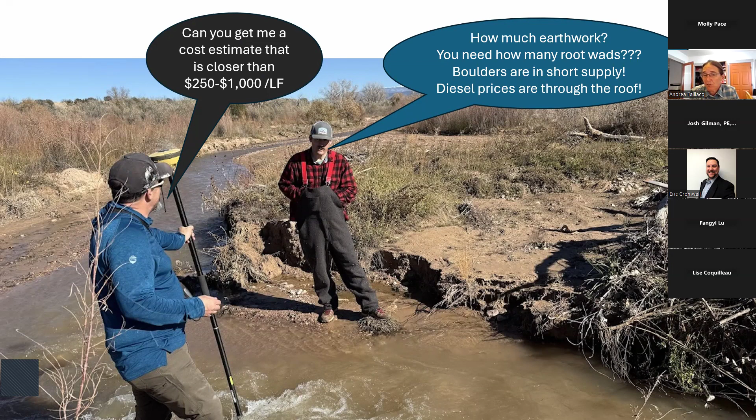And then we work with some other clients that will go back in time, and they of course Google a manual and come to the meetings and say, well, you have to do this. Never mind that you work in stream restoration every day or you have expertise in one area of this or another. You have to follow this manual, even though it may not be applicable because we've learned so much more over time. That's one of the places technology really brings us problems, in that it keeps older material in front of our stakeholders. It gives us a large mountain of information to try to overcome these assumptions.

Most of our projects start with a geomorphic reach survey. What we're going to try to figure out is what is the cause of the problem, ideally, because if it's not broke, we don't want to fix it. Your typical geomorphic assessment includes a couple cross sections, a longitudinal profile, maybe a bar sample, some active riffle pebble counts. Maybe you do a banks assessment, but it's pretty sparse data.

And this is where we really get into technology. So we have used drones. We own a LiDAR drone, and we are able to collect a lot of data really quickly by flying that drone. However, with lots of data comes lots of data processing. So a picture can save us 1,000 words, steps, or minutes, but it may also require additional time in the office. So we have to consider that when using technology.

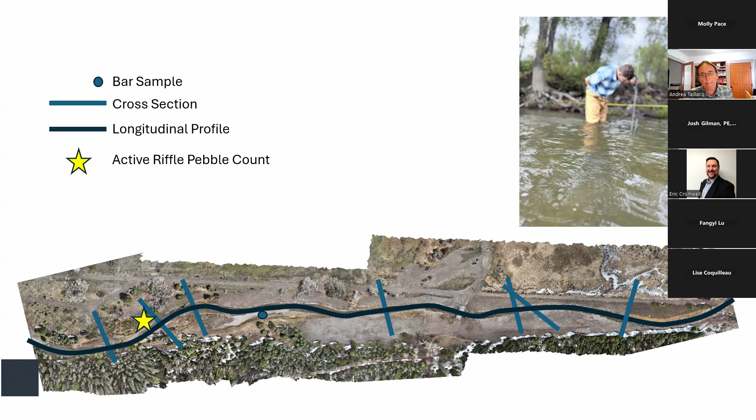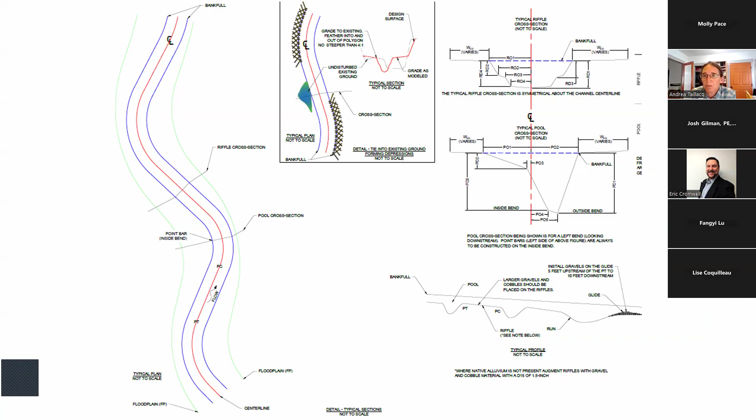Back in the 1990s, it was pretty typical to just use typicals, and you have small groups. They all have very similar backgrounds, so they can kick the dirt, have a conversation, and lo and behold, successfully implement a project. And there are many people that can do this.

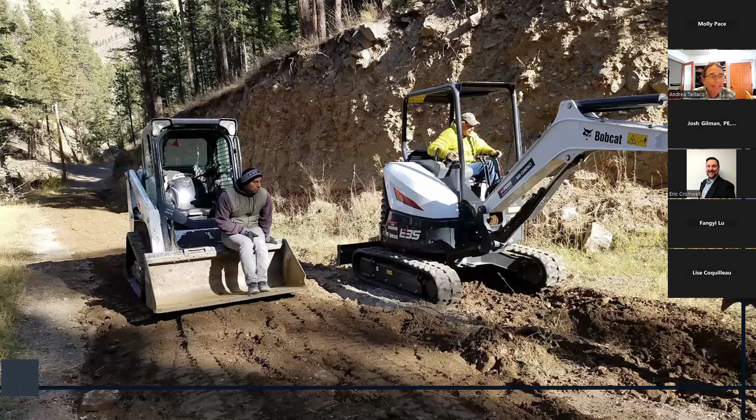As our projects have increased in complexity, we have transitioned to the breakline spreadsheet. There's various other proprietary applications that have been used to do stream grading, so we can do this in 3 dimensions. We have models, we can put that in HEC-RAS, and we can do all sorts of evaluations. I'm going to talk mostly towards Stream Tools and Corridors, and then do a little bit of preview for Stream Tools Flex, which I'm currently working on.

One of the challenges we took on with the COVID pandemic was taking this breakline spreadsheet, which David Beidelschbach, Mike Geenan, and others developed to do grading for channels that includes riffles and pools. I think it was in about 2019, we were helping David with some projects, and he had about 5 interns. One of the things we really noted was how much time the interns were spending trying to learn about managing text files to use a spreadsheet to bring it in and out of CAD. I was like, well, we could probably put this in CAD. And so that was where Stream Tools was born from, was figuring out how to put it into CAD.

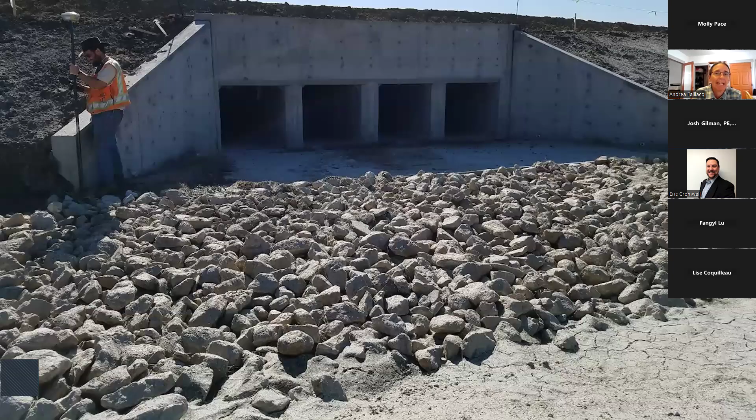As our groups become larger and more diverse, we're having more and more questions, and more and more complex projects with infrastructure, endangered species, material availability. So as our projects require tighter tie-ins and increased complexity, we need technology to be able to model these systems prior to mobilizing construction equipment.

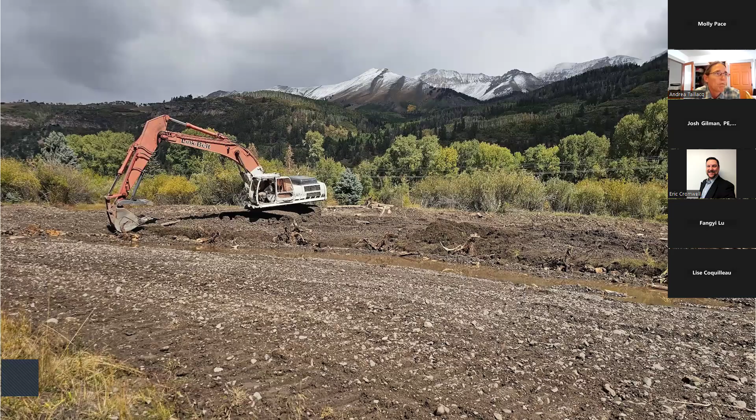And at this point, the technology exists that that excavator has a GPS unit mounted on it, and that bucket will stop at the grading limits.

Just because we can put something into a computer doesn't necessarily mean that it should start there. Often it helps to draw things out. We've got a whiteboard in the hallway, and we'll draw it out and think about what's going on, where our computer outputs are wrong. Where computers really come in is they're really good at doing repeatable tasks. So you do it once or twice, you figure out a process, and then you let the computer do the rest of it. And that's exactly what Stream Tools, Corridors, all of those tools do.

So I brought in this example project. This is the grading sheet from one of the projects we worked on. Some of the technology we routinely use includes RTK GPS. We did all the geomorphic survey. The existing ground was from LiDAR we collected. We often use 3DEP, but this particular site had a lot of earthwork moved, so 3DEP was no longer representative of conditions.

We evaluated flood risk with HEC-RAS 2D, planting zones, very detailed. It was constructed with GPS-enabled equipment, which wouldn't have been possible without this detailed site plan. All the channel grading was done with Stream Tools.

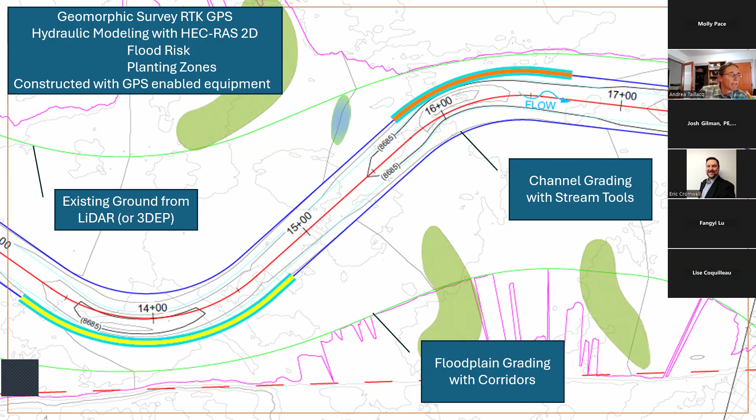So I think one of the takeaways was technology should allow us to do more analysis. It should allow us to paint clearer pictures for our stakeholders, evaluate alternatives, and really emphasize that it can save time and save money, but it doesn't always. Technology always requires synthesis, and one of the big things technology helps us do is generate quantities.

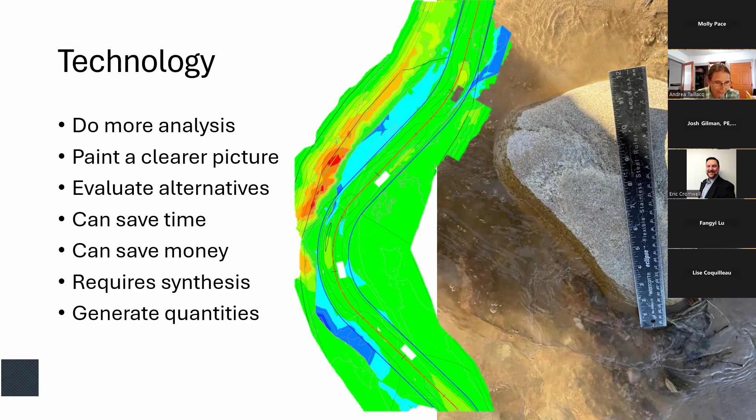If you draw your toe wood to scale, you can literally count the toe wood in the drawing to make sure you have enough. But that doesn't account for various sizes of trees, and it doesn't account for the human factor, which we always have to have in.

And so in many projects, you develop and spend all this time putting together plans, and then your contractor says, well, I know what it says, I'm not going to read the plans. And you get to the end of this and you're like, why do we have materials left over? And why does this not look like the plans?

So although you have detailed plans, it doesn't replace construction observation, and it doesn't replace time in the field. We often end up with stakeholders who think they understand what's going on, but it's really hard to get them out in the field. In which case, they tend to not have as much of a realistic vision.

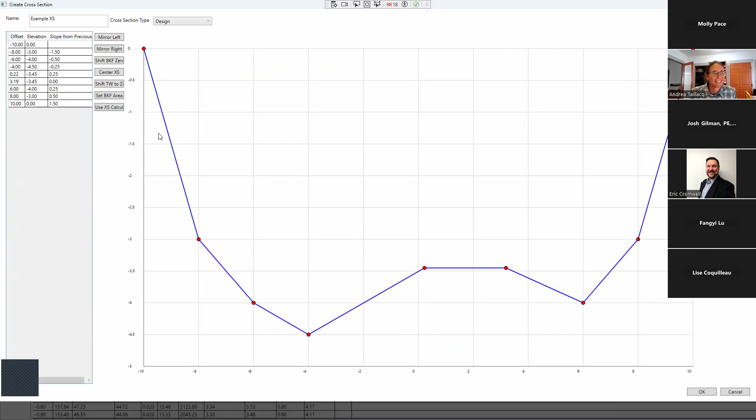One of the things that was requested was including hydraulic parameters, so all of those are included. We can edit cross sections, draggable points, slopes - I'm still working on the interface. The addition of having as many cross sections as you want, being able to do multiple reaches, all of that will be built into Flex, plus more saving options and some of those things.

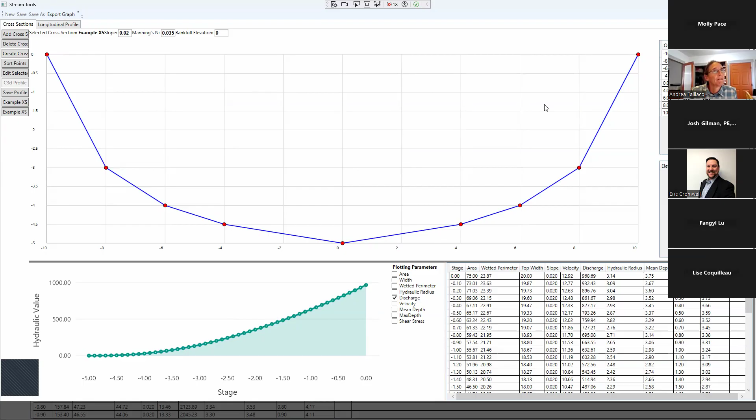One of the other challenges, going back to how we collect reference reach data - Stream Tools and the breakline spreadsheet create this reference bankfull line to keep the pools flat. It's really hard for people to imagine what that thing is, and it's kind of in the background. So I'm going to change things up and we're going to do a thalweg and bankfull profile design, sandwiching it between those profiles so we're comparing our reference data more closely to our designs.

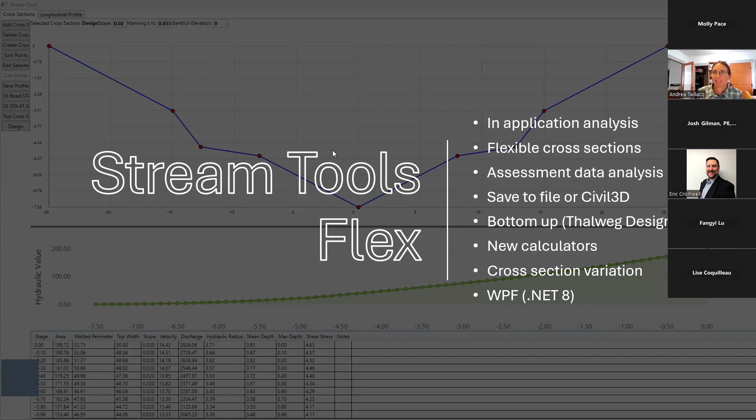New calculators, new cross-section variations, and then the ability to save the file to Civil 3D or just a text file. The cool part is that the tool doesn't have quite all the same functionality without Civil 3D, but it doesn't require Civil 3D, so we can do more geomorphic analysis without having a subscription to Civil 3D.

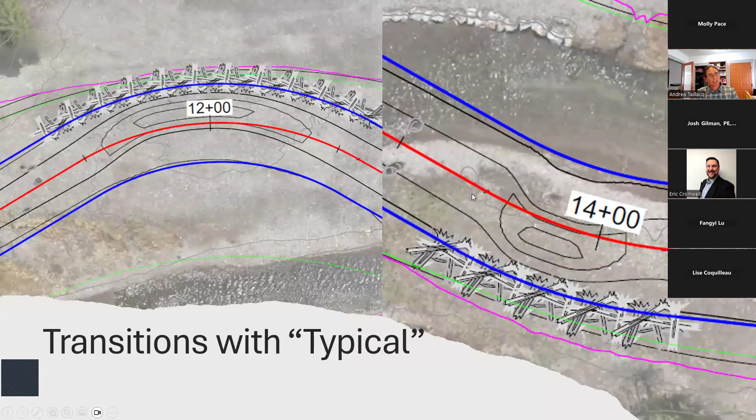I think I covered most of these. One of the challenges we're working on is improving those transitions from typicals. The whole purpose of this is so that you can iterate and shift your focus from arduous file processing to thinking about your design and how your design addresses the project objectives. So one of the things we're trying to address is the transitions with those typicals. And that is all I have today.

Sorry about the interruption there. That was all right, great - I love that, Andrea. Thanks for the share.

I didn't know you were going to be speaking about the tool you guys put together and have been working on, but I have experience with it, and it's been a great tool. Speaking of it as a communication device, a lot of folks who came up in the world of streams maybe 10 or 20 or more years ago have a different relationship with the metrics we calculate and the data we collect. Something I've been challenged with is trying to recreate those connections with new practitioners and younger, early career people. We have people coming into the stream sector who say, 'I've never had open channel hydraulics classes,' but yet they're finding their way into doing sophisticated modeling. It's like, wait, let's back up.

Sometimes these engineering tools make things readily available to us. It reminds me of the wristwatch - somebody invented a clock so we could keep time, and they were able to be more efficient and put it on a wrist, and quality control enabled everybody to keep the same time. But I don't really know how that clock works - it just tells me the time. So to the point, we're bringing solutions without always knowing where the good stewardship came from.